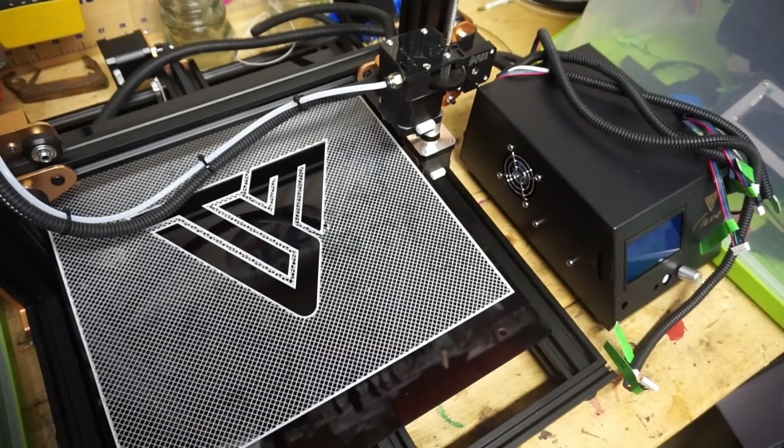If you're familiar with 3D printing technology, for today's video I'm going to be unboxing and setting up a Tevo Tornado 3D printer. So I have the box that came in, and the first thing we're going to do is unbox it.

So here's the box. It's a pretty heavy box, not much on the outside, but there are parts and stuff in it. Now I'm going to get my box cutter and open it up.

So this box definitely came from China, this printer did. My main concern is whether this is going to be a partial assembled kit or just a fully assembled printer. I'm not really sure.

Opening it up, there's styrofoam, and an instruction manual, an assembly manual. It looks like it's a cool color on that. So this goes to the side.

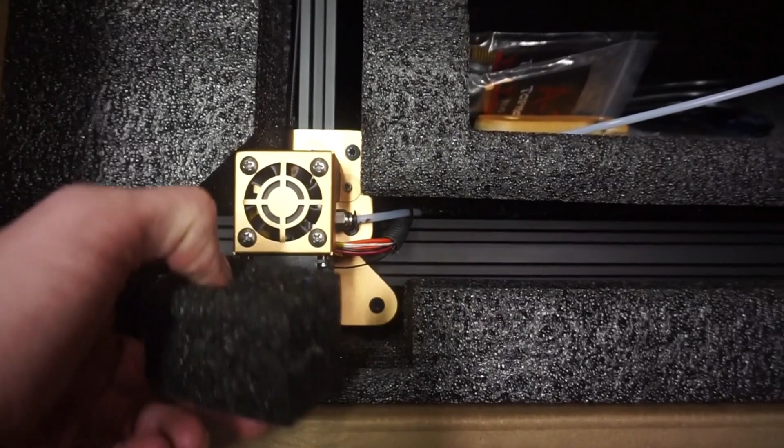I'm going to take out all these pieces of foam and see what's under it. As you can tell, you can see part of the frame. It looks like it's partially assembled. I'll probably still have to connect the base plate to it and connect this piece to it on its side. And here's some cables and stuff to finish it off with.

Inside the box, looks like we have one piece of styrofoam left, a pocket of hardware and tools, a power supply, and one piece that looks pretty assembled, the frame.

So I'm going to remove this pocket of tools. Got a spatula, USB cable, tubing, hardware, power cord, more hardware, and tools.

Next I'm going to remove the power supply. You can see it says Tevo on the front, plus the fan, SD card, and then all the connections on the back.

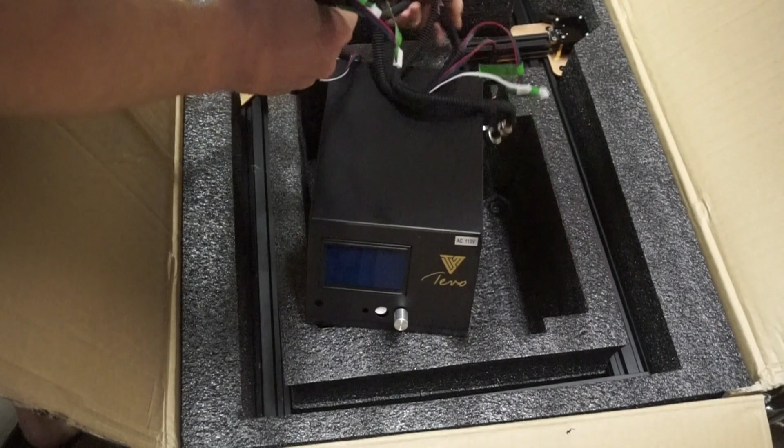So next would be the frame. It comes out as one piece. I'll put that piece back in here.

There is another spot in the bottom down here. It looks like the print bed, another portion of the frame. I'm going to set the top part off to the side to reveal the bed portion.

Now I'm going to clear some space off and get this portion set up. Here's the print bed setup, or the pre-assembled portion that came out of the box. It has the build plate base, the Y-axis cable with the motor, and the extrusion frame setup.

I thought the print bed was attached, but it was not attached to it. It had a cable that goes to it, so I've set that up right through.

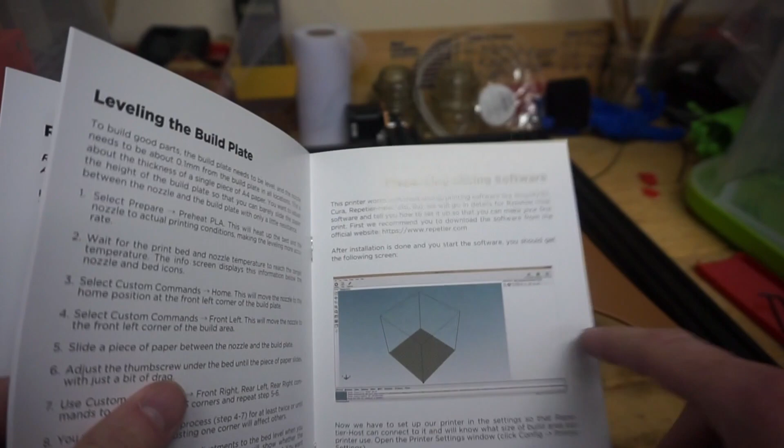Got your warnings there. Then assembly - first is to remove parts from the box and inspect to make sure they are not damaged.

Install the gantry frame to the base frame. Looks like you'll need 2 screws and 2 washers on each side. So let's get the gantry frame out.

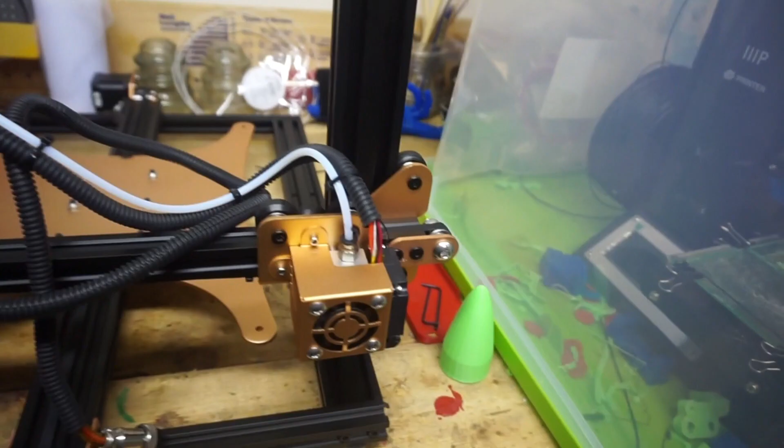So here is the gantry frame, or the Z and X axis. We have the hot end with the frame.

The top piece looks like 2020 extrusion, and this side piece is 2040. And it looks like that's the Z-axis motor.

The Z-axis motor is on the back side of each - just that one. And that's the extruder motor; this goes all the way to the extruder. The black cables probably go to the control box for power and other electronic stuff.

So now we need to get 2 screws and 2 washers for each side to put them into place. We're probably going to go here with the 2 holes on each side. Looks like it's going to be this bag, A2. I got this set, but that's probably going to go for these spring things.

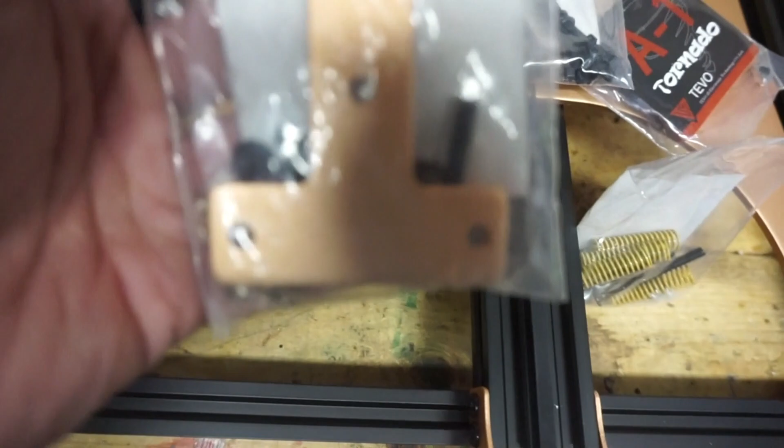So I'm going to try these right here out. For this I'm going to do it one side at a time - just set this piece on here, then put the screw with the lock washer onto it. Now I've got one side of it screwed into place.

I don't know if you can see it, but it's a pretty good fit. So the next step is to go to the other side and finish it up.

The next step is to install the 2 T-shaped reinforcement plates for the frame. We got one that's just a T, and the other one has an end stop piece connected to it. Separate out the hardware for each piece, and then connect it.

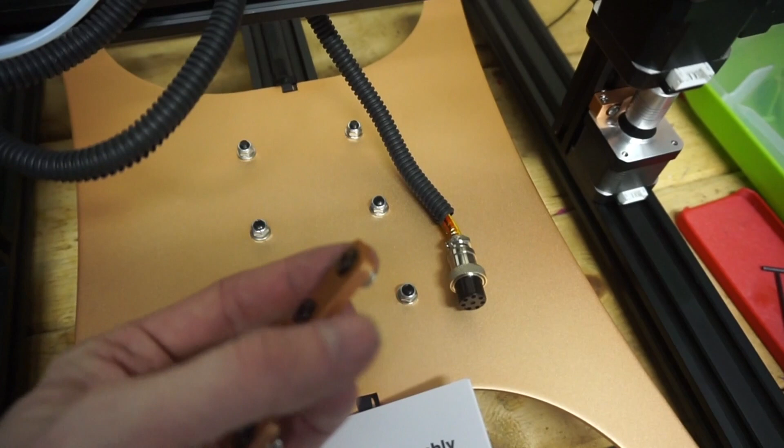So here's the one without the end stop. Got the screws on one side, and then the T-nuts on the other side.

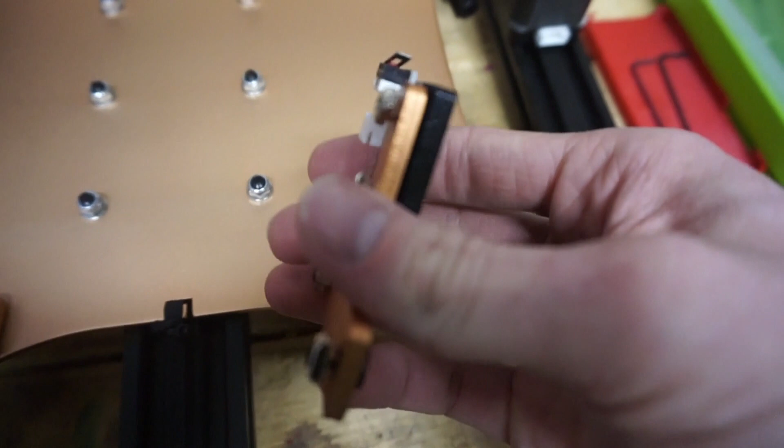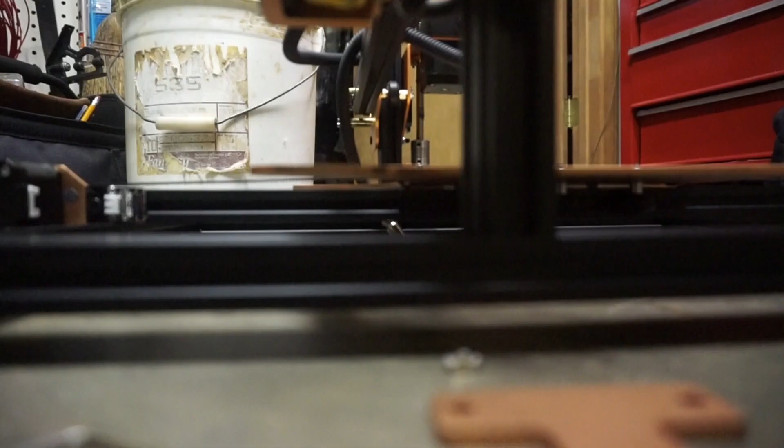The next step is to attach each of these pieces to the side. I'm going to attach both pieces and show you what it looks like. To do this step, we're going to put the T-nut in here and then turn it - that's how this goes. Okay, let's try this again.

So like that, I got 3 more to go. So here's all 4 of them in. Gonna put the plate on and adjust them. They're easy to move.

I'm gonna attach this plate and then attach the other side. So here's one side done, got all 4 screws and T-nuts mounted. These plates are made just to reinforce the Z-axis so it doesn't wobble back and forth when it prints.

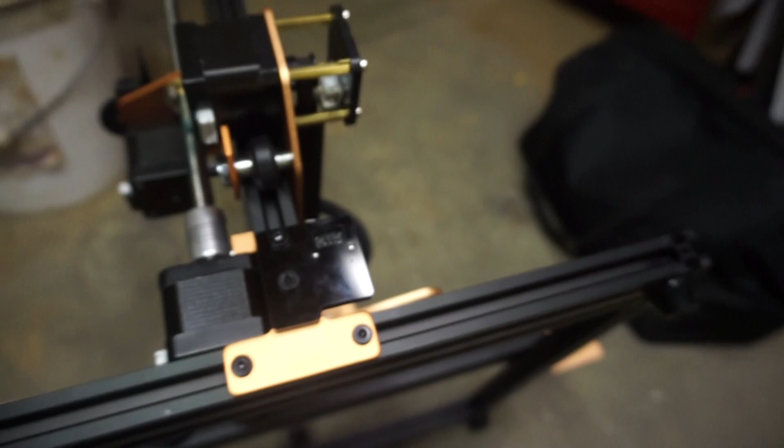Now I'm going to do the other side of the end stop. The instructions want this piece mounted like this, with the end stop piece on the back side of the stepper motor. So now I'm going to mount this piece. So this side is now done too, got both pieces connected. So the next step, according to the instructions, is to attach the electrical cables in the box.

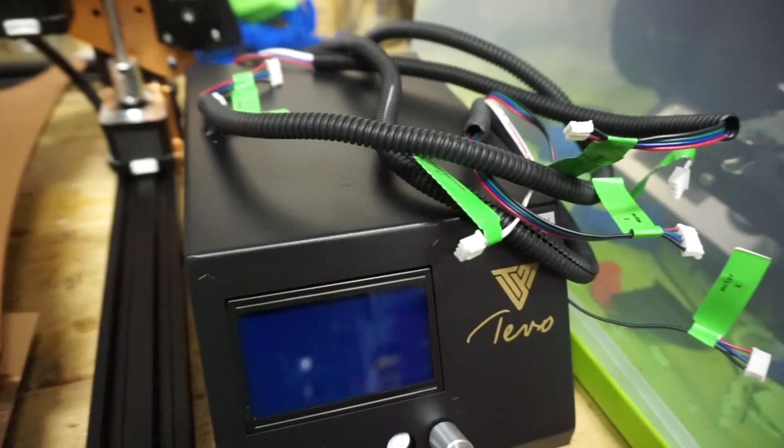So the next step is going to be connecting all of these cables and stuff to the printer. This is going to be the control box, where you can pause, stop, start your print, preheat the bed, etc. As you can see, you got the logo, got one knob I guess to move the menu around. Then you got a fan, and then you got a power button.

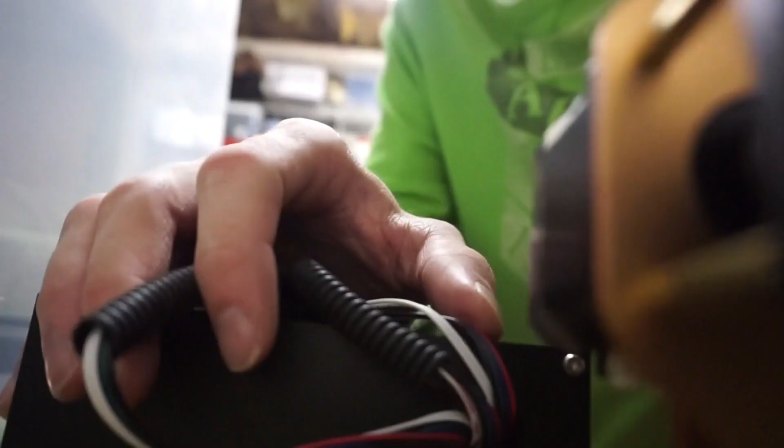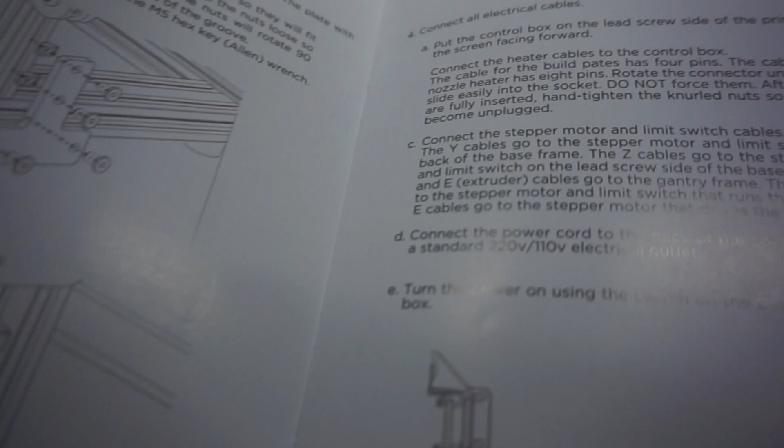Cables coming out, take the power supply. Not really sure what these are for, maybe the print bed. So we gotta put the control box on the lead screw side, so this side. Connect the heater cables to the control box, assuming that's part of the print bed. Then the nozzle heater. Do not force them into the connection.

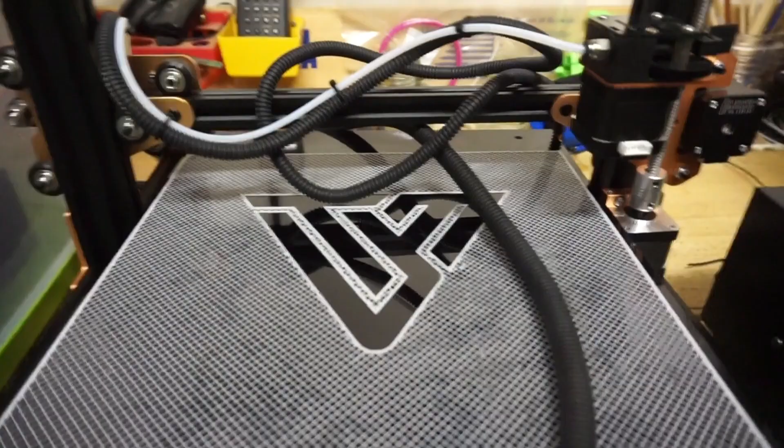Alright, so let's get started. So here's the print bed. It does have a connection that we may plug into it, and this is just a cover for it, I believe. This comes off like that.

But I also found in the instruction manual, I was looking ahead, there doesn't seem to be any mention of how to assemble this piece. I mean, it should be fairly simple, but it would be nice if they gave us a little description of how to assemble it.

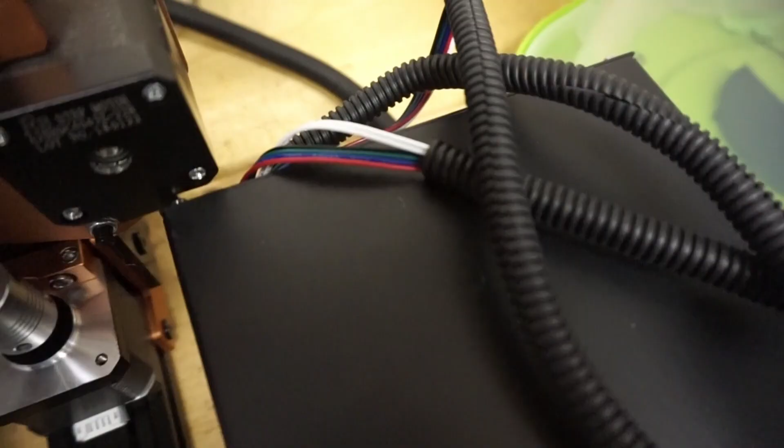I'm gonna get all these cables connected and then show you where they all go to. Okay, so I got the heater cable. This one has 4 pins right here, if you can see it, and it goes to the heat bed. So I'm gonna be connecting this one to this port on the control box.

Okay, so I got one of them done. Just rotate it till it fits into it, and then you tighten it with this nut right here so it doesn't come back out. So I got one more to go, and the power supply, and these to plug into.

So the next one was the nozzle heater. It plugs in the same way. It goes to the hot end.

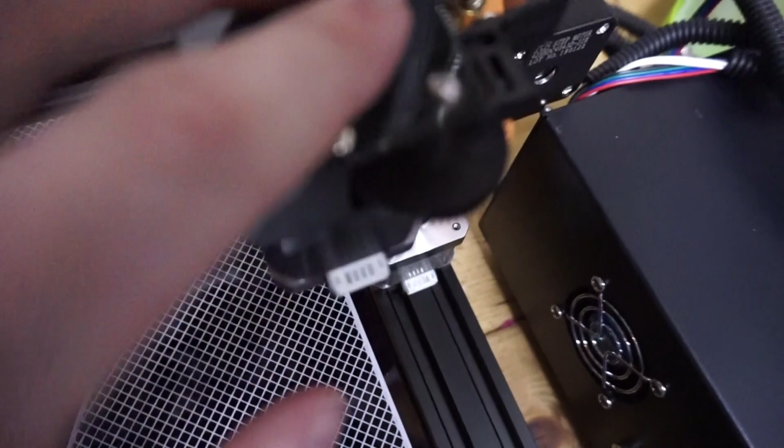So next in the instructions is to connect all these cable stepper motors and limit switches. I got the Z motor and the Z end stop connected. There's 2 cables in one, and this is a very tight fit. They could have made these cables a little bit longer, I think, but I'll try to adjust it after I get everything assembled, see if we can get some more room.

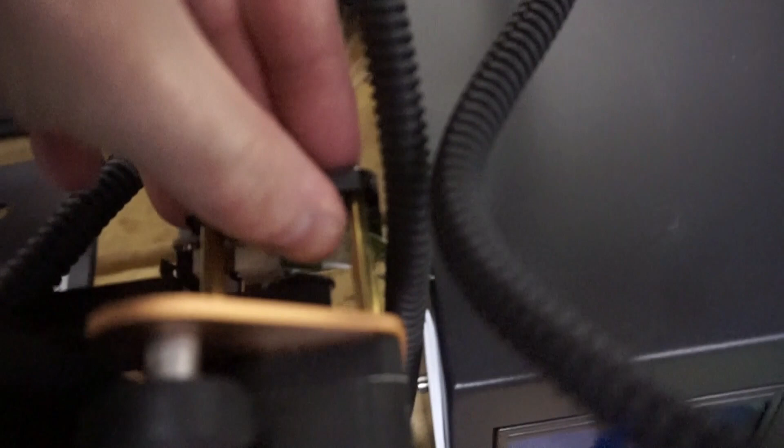But next is this cable. So I got all the cables connected. The only one that seemed a little bit difficult was the X stepper motor, because it did seem like it's connected all the way, but I can't get anything else about it. And then this one seems really tight, the length. Other than that, they're all in place.

And according to the instruction booklet, connect the power cord, then turn it on. And there is nothing about how to set the build plate up with.

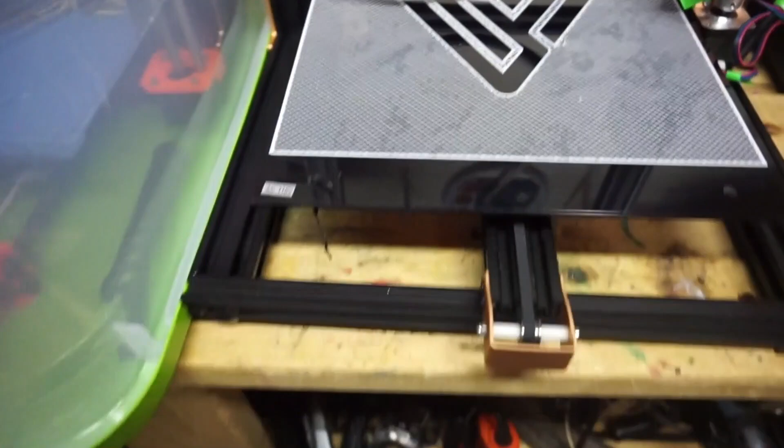So I got some zip ties, some springs, spacers, and some screws. So I'm going to figure this out on my own.

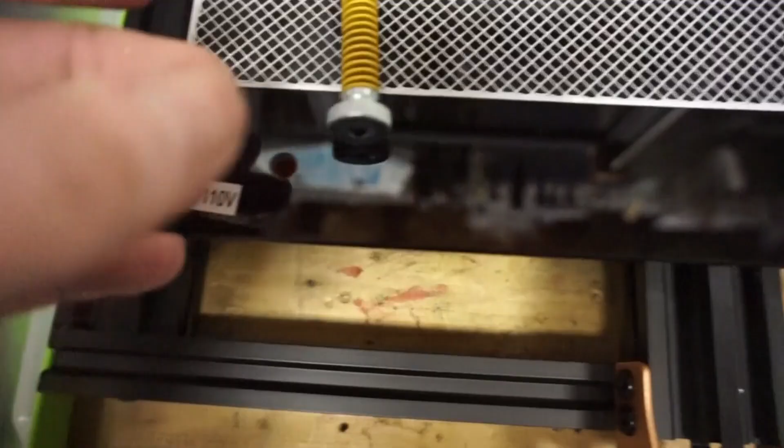So we can't have this piece sticking out the top because of the hot ends. I'm assuming this piece is the top, the screw. Then you got the spring, and then you got the nut tightener piece.

So here's the first one connected, how I think it goes. Get the screw coming through it, then put the spring on, put it through this plate, then put the nut on. So I'm gonna set it up like the Monoprice did. I'm gonna get the thread through the end of the nut. Once I get them all on here, I'm gonna tighten or turn each piece until the bed is level.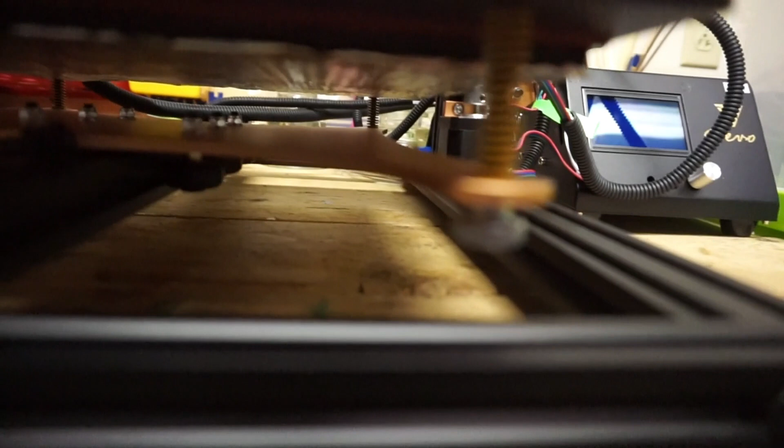So I'm gonna get the other 3 remaining screws onto here, then we'll start the bed leveling process. Okay, so now all the springs are in place. As you can tell, the bed's on here. Still needs to be leveled, but it's on here.

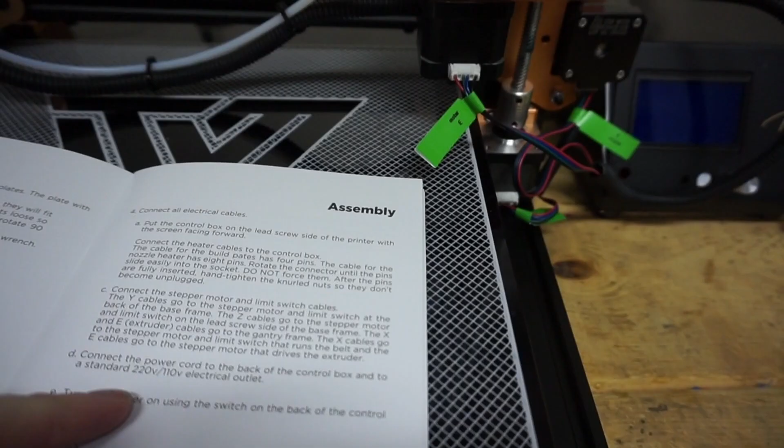So, do we turn the power on yet?

So I'm gonna plug the cable, put the power in the back of the control box, and turn it on to see if it comes on. Okay, so it's plugged in. I'm gonna flip the switch on the back.

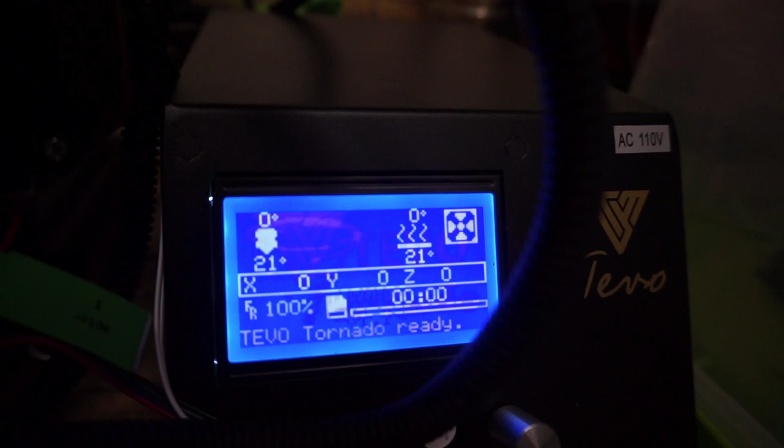Tevo logo. Info screen. So the clicker is pretty solid.

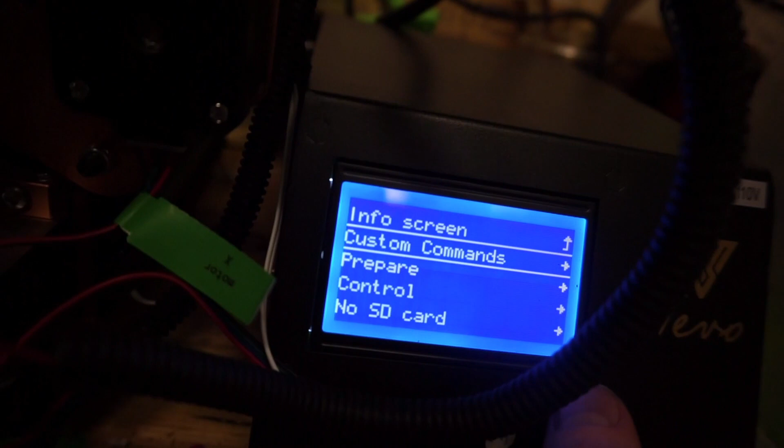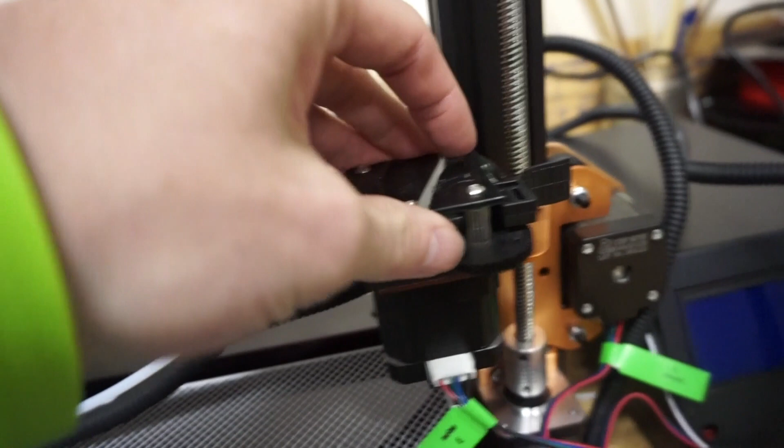Okay, so I realized what I got wrong. This is the Z-axis cable I plugged into the Y motor, so I'm going to switch those two out. And I thought this was the hot end piece, but this is the extruder. The hot end piece is right here, and it does have the nozzle on it, I believe. I have to raise it up to make sure, but I'm going to switch the cables around and then test it out again.

Okay, so this does give a lot more room with the cables now. So this does make more sense. Turn it back on.

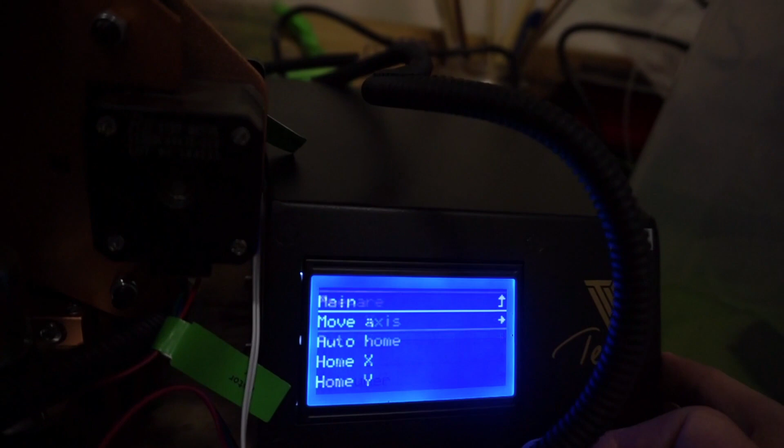Comes on every time like that. So go to prepare, move axis, Z axis. Do 10 millimeters. And here we go.

You can see these pieces are moving. Okay, so turn it back off. It does indeed have a hot end nozzle attached to it.

See right here, it's just a motor for the filament to go in through. Put the filament in through here and it pushes it through here to the nozzle. Something similar to the monoprice does.

So now the only thing left we got to do is load filament into it, do the cable management if you want to, make sure the axes and electronics work, take this piece off and level the bed, and then we can do a test print.

So what I'm doing right now is going through the instructions to get ready to adjust the bed. I'm going to take this piece off, but the instructions say this is a Titan extruder, just in case you were curious. So now I took this piece off that was covering it.

As you can tell, it's really glossy and it's going to be a fingerprint magnet. Not sure if it's going to stay like this, but we'll see.

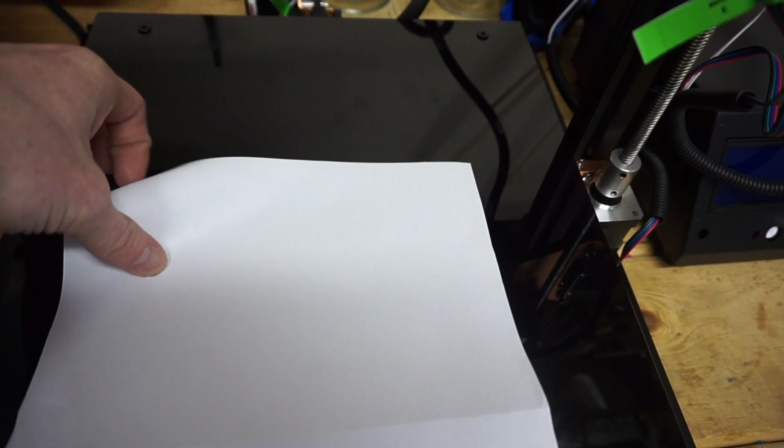Fortunately, the instruction manual does give us a whole page on leveling the bed. So that's good. First step is to select prepare.

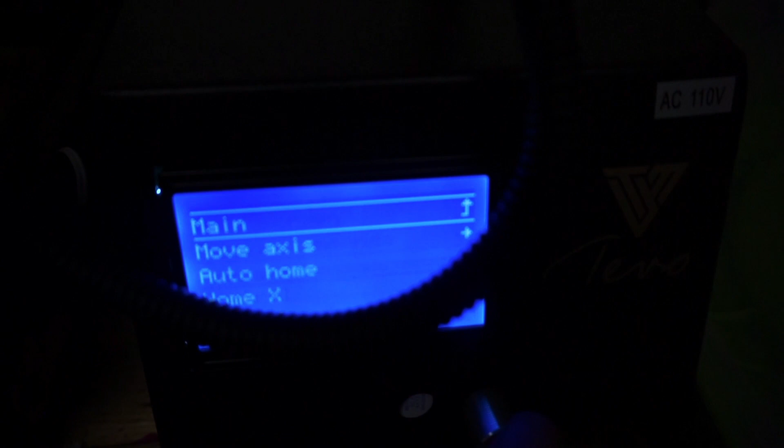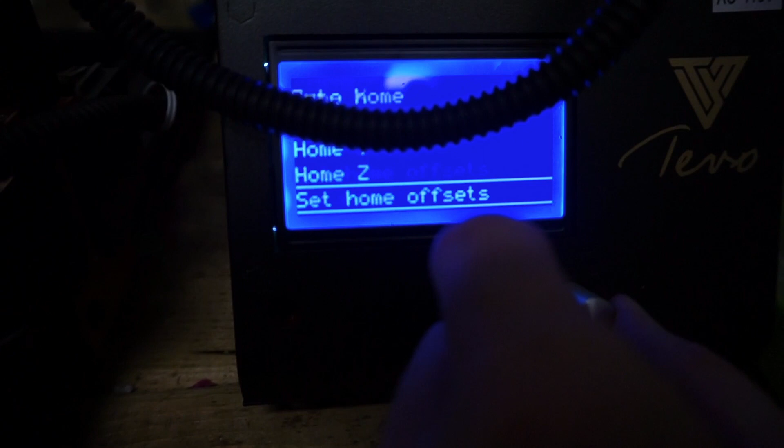Preheat PLA. So you can find that. Scroll ways down, but okay. This will heat the bed up, and it's supposed to make it more accurate.

Okay, so it says preheat PLA in the instructions. Preheat PLA, let's just do that again. Here's the fan going on the control box.

So we're going to wait for that to heat up, and then select custom commands and auto home, which will move the nozzle closer to here. And then do front left, just to make sure both sides are over. So we're going to wait for it to heat up now.

It's pretty fast, but the nozzle is at 91, 94, and the bed is at 36, 37. Okay, so now that's close to being preheated. Go to custom commands and hit the home.

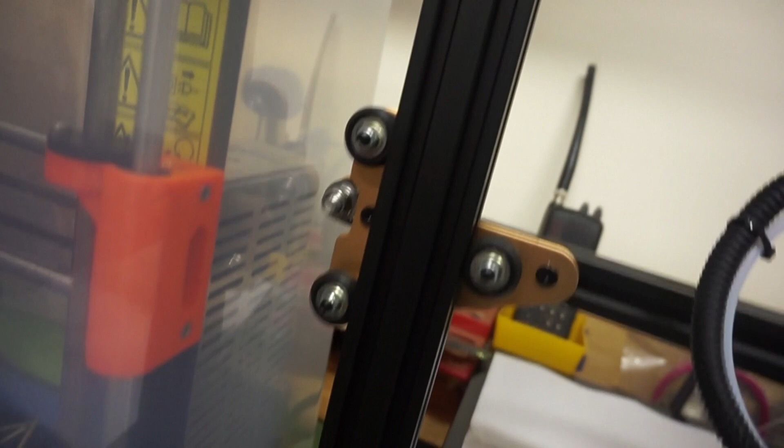Turn that off. So I need to do some cable management before I do that. So two things, I need to do some more cable management first and grab some more room for this printer, which is a big printer.

Okay, so on this cable right here, I had to unscrew it from the control box because I had it wrapped around the back side of this piece, which I need to be wrapped around the front side. And for the bed, this cable is going over it, which needs to go under it and out the bottom, so that way it can clear the stepper motor.

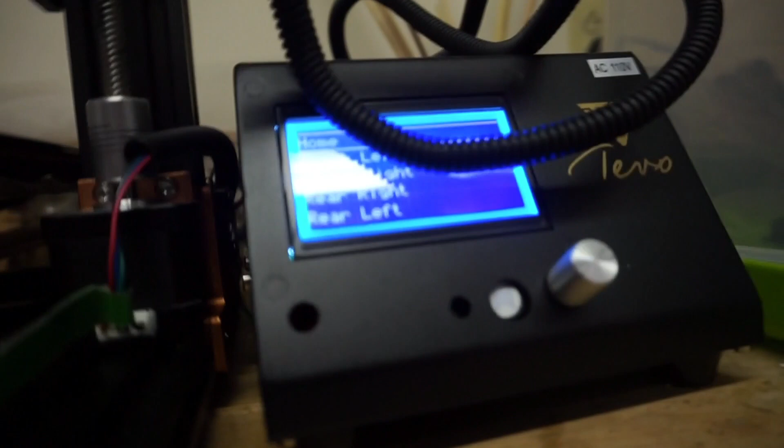So now we're going to try this again. Go to commands, home. Oh yeah, so it's going to hit the box.

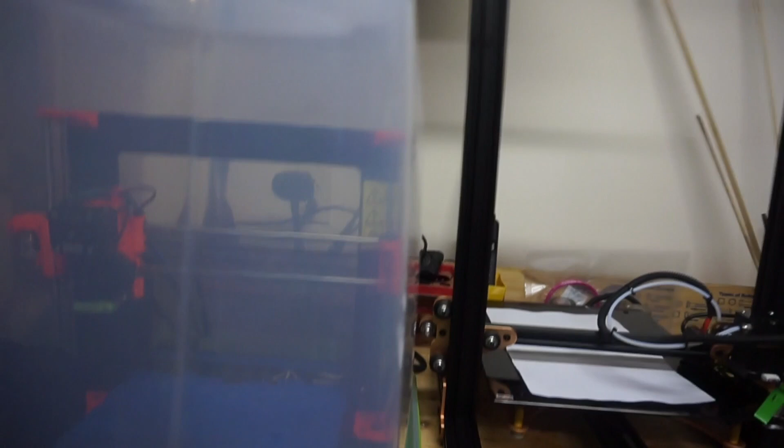So yeah, I need to print some more space out before I do the home axis. Okay, so I made some more room for the stepper motor to go down. So we're going to try this again. Going to prepare.

Okay, so it's at the home axis. We'll see if we can get the paper to go through. Don't think we can, so we're gonna have to raise the bed.

Yeah, so you can see here how much it comes up and goes down. So I got it tight enough so the paper slides underneath it now. So next step would be moving it to a different position on the print bed.

So here's the home position. Take the paper. Done.

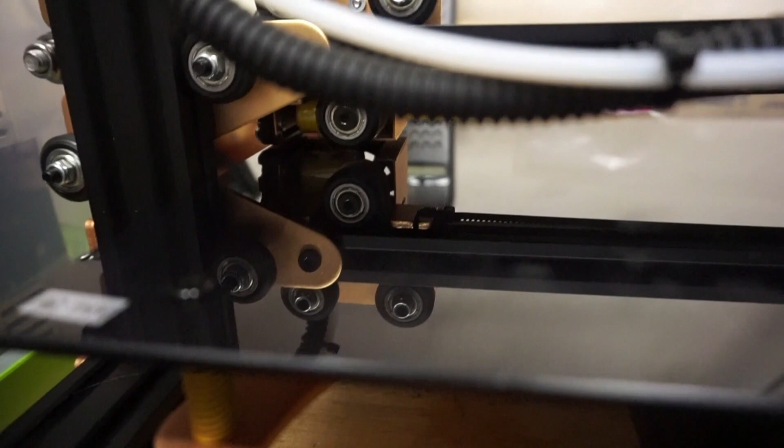So now we're going to do the front left. Front right. So I have to work on that one. So front right is done. So now we're going to do rear right.

That doesn't look right. We'll have to try this again and figure out what's wrong with it. There's about an inch of clearance right there.

So I was realizing that I had a big offset going past the build tray, and it's not going all the way up, I don't think. So I was looking at the assembly manual to see if I assembled it wrong.

This piece, the extruder hot end, should be on this side, but it's on that side. So I have to switch the frame around and flip this side over. I thought this piece was initially the hot end, so I have to take the plates off and switch the sides around, and hopefully that works out.

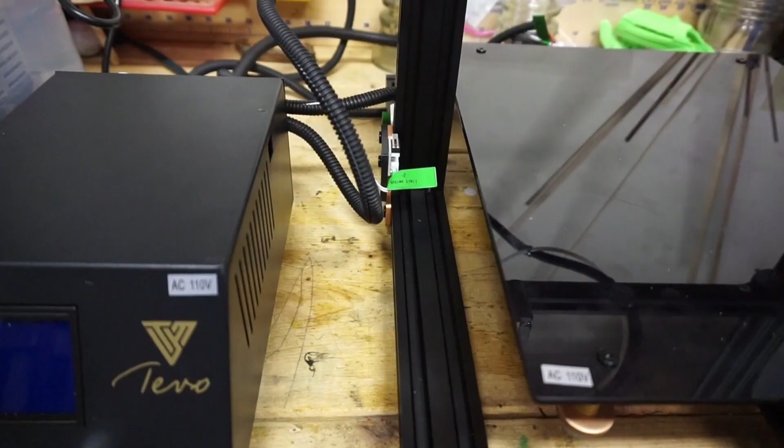Once I get that switched and do the paper test to make sure it's all calibrated, hopefully we can start a test print. Okay, so here's what it's supposed to look like set up.

This piece is on the right hand side, and this piece is on the front side. All the cables do fit the length, but this one's still kind of iffy about the plug-in. I think it's plugged in, but other than that, everything's set good.

I'm keeping this under this corner, just in case it triggers the Y-axis. But other than that, it should be working. So I'm going to turn it on.

Running through all the calibration tests, doing the paper test, and calibrating the print bed, adjusting where needed. Then hopefully I'll do a test print.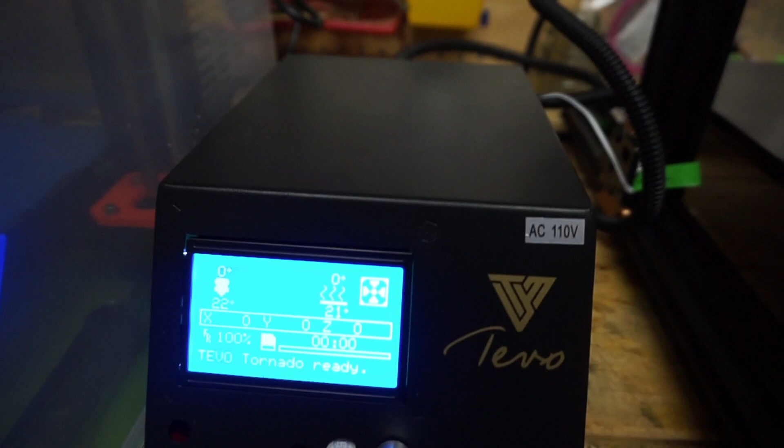Okay, so I think it's all calibrated, but it still seems like the Y-axis isn't getting triggered on this end stop back here. So I'm going to check that out to make sure, and then load the SD card into the control box and see if we have any sample prints.

If not, let's go with the traditional Benchy print. I don't really think there's a problem with the Y-axis, but if it continues during the actual print, I'll stop it and figure out why. I haven't printed on a glass bed before, so we'll test this out too.

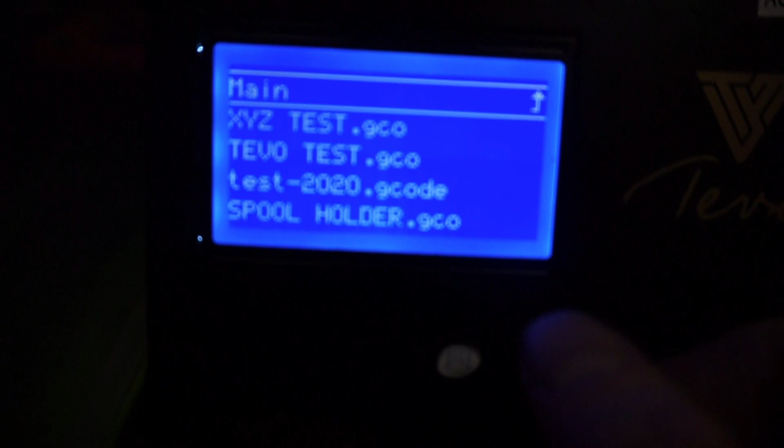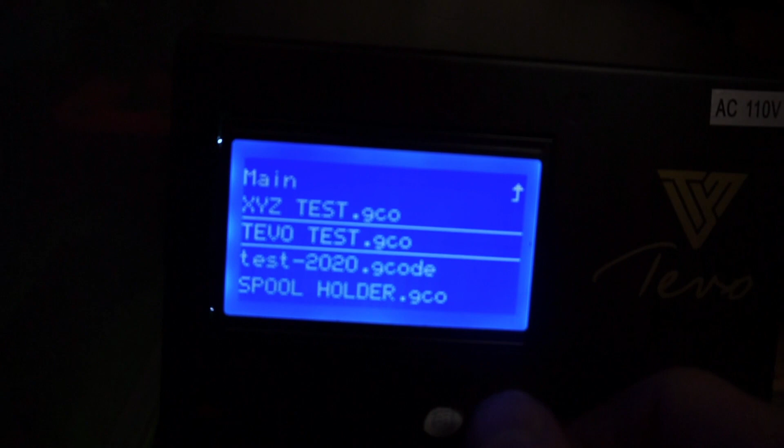So now I've got the SD card in here. It does have some prints - XYZ, Tevo, I'm pretty sure that's the logo, and a spool holder, which would be nice if it came with one. But that's it, so I'll probably go with the Tevo test since I know what it is.

So now I'm going to preheat it and get it started, but first we've got to load the filament in. It did not come with filament, so maybe I have some left over from another order.

It also did not come with a spool holder for a 2020 mount, so I'll probably get one of those later. For now I just got this hanging up. So we're going to load the filament in first and then start the test print.

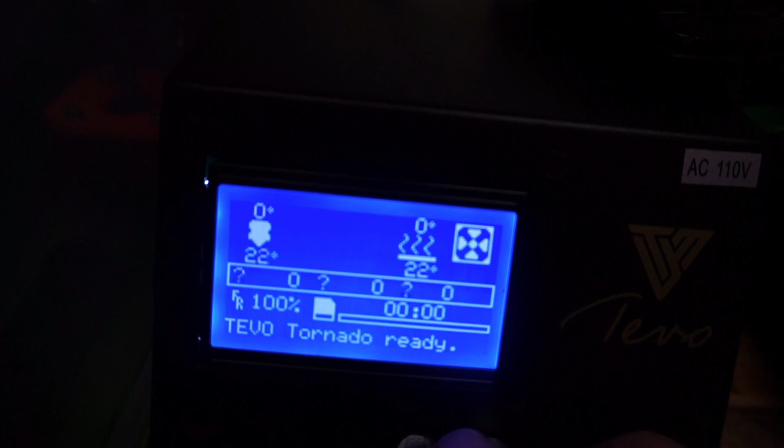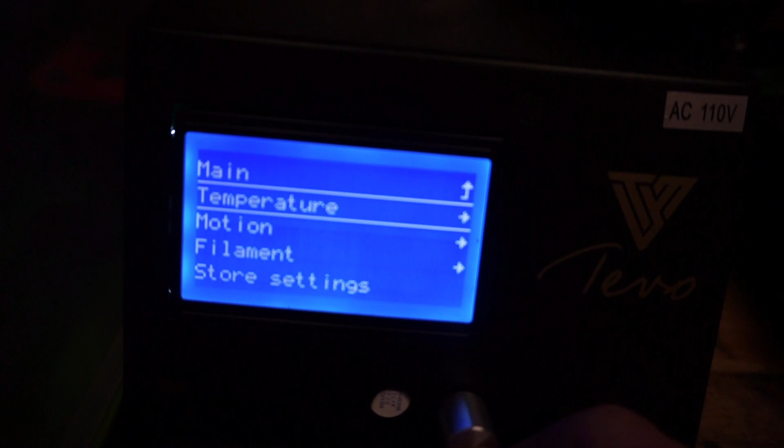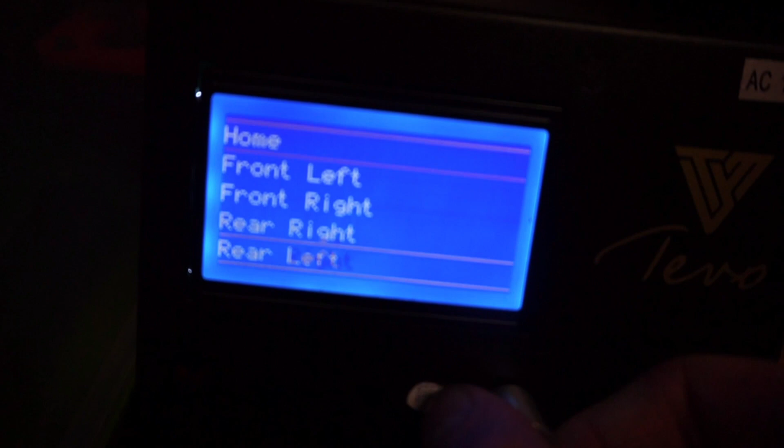First thing is going to be to heat the printer. Let's scroll down through one of these menus - preheat PLA, do both.

So I fed the filament in through the separate motor extruder piece, and you can see I got it started. Next I'm going to move it further down until it comes out the end. I don't know if you can see this, but it's going very slowly - you can see the gear piece moving right here.

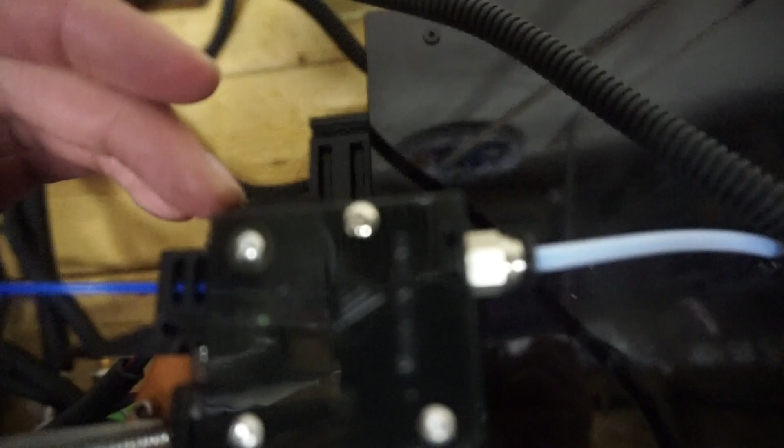Okay, so we have some filament coming out the end, so next is to test print it. Still don't know what that part is yet. What does that mean - extruder heating?

So like I said, I haven't printed on glass before, so we'll see. Not sure if I need a glue stick or not.

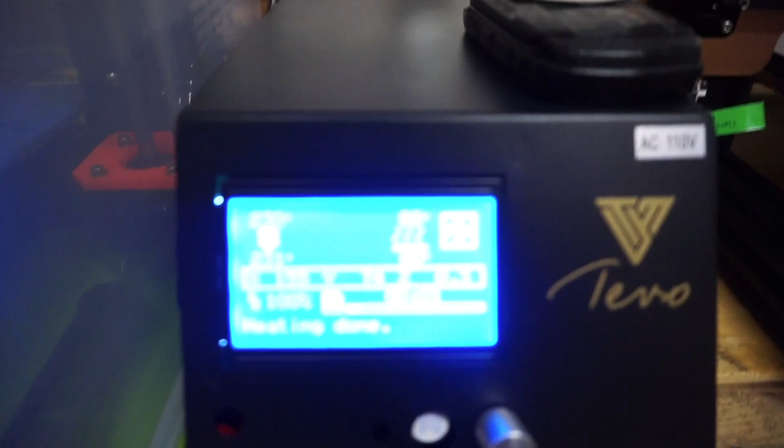So right now it looks like it's doing an outline of the Tevo symbol, and you can see right here the percentage it has done. I don't know if it's going to be a 3D object or not.

So I'm going to let progress run and then show you the update. So it has a new path it's making around the edge.

I'm guessing it's going to be something like the bed cover that came with it in the box, but we'll have to see once it gets done. It's probably just testing out the rubberness of the edges as it goes too.

But here is where it's at - still not halfway yet. So now it's doing the infill piece of it, I guess that's what it's called.

I'm pretty sure that's what it's going to be, that bed cover that came with it. And it's still not halfway, it's only 5 minutes in.

Okay, so it's about halfway done, over halfway. So I came back to check on it, and 2 corners are lifted up. I'm pretty sure it's supposed to use some kind of glue on this, but I suppose I'd rather finish.

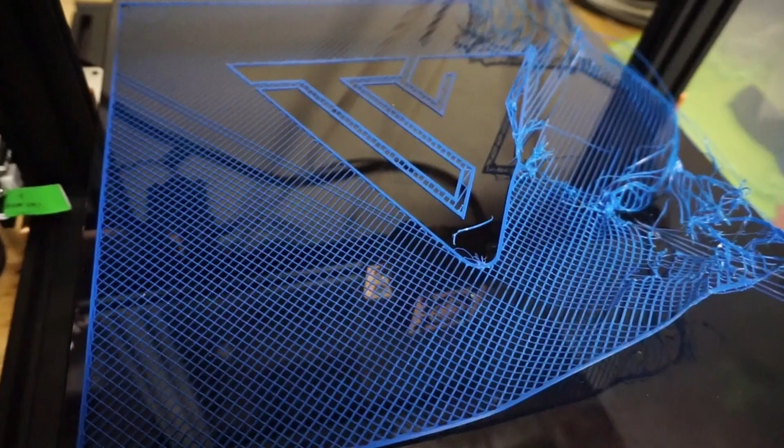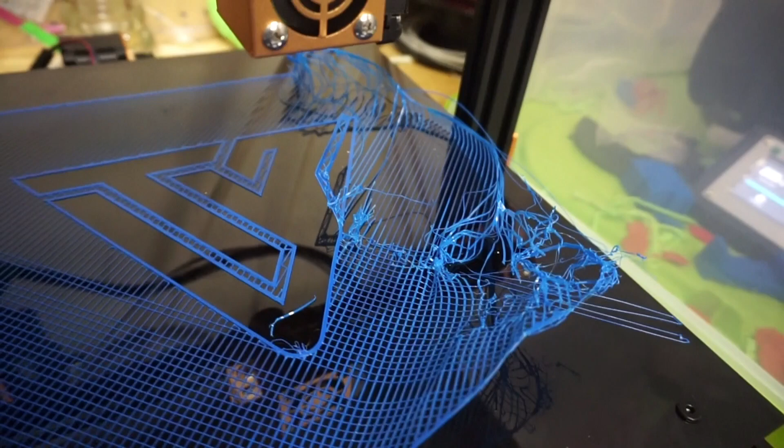Okay, so it didn't come out with a good first print, but nonetheless it's set up, it's unboxed, and it's working. The first print failed because I don't know how to use the glass print bed just yet.

So this is going to do it for today's video. I've unboxed and I've been printing with the Tevo Tornado 3D printer. Hopefully I can get a better print in the hands-on first impressions video.